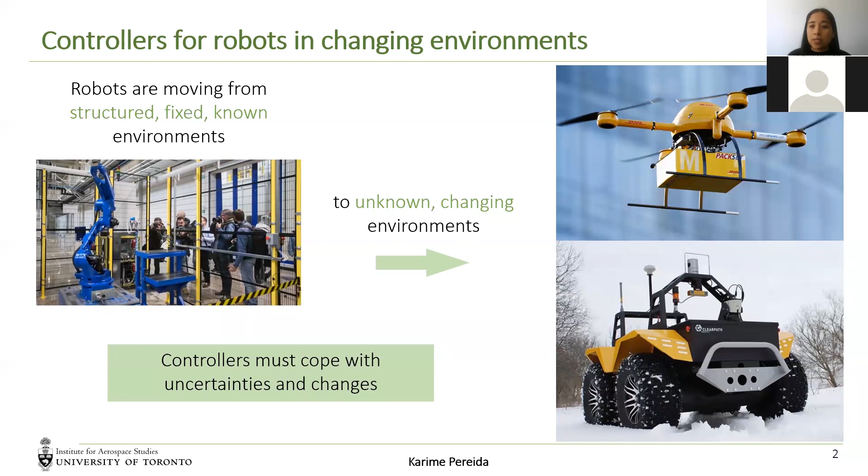In order to do this task successfully, robots need to have controllers that cope with uncertainties and changes. The goal for them is to follow a desired trajectory Y star accurately and reliably. What I mean by accurately is that they follow the trajectory very closely, and by reliably is that they follow the trajectory even if the conditions change or if the robot is changed.

Usually a controller looks in the following way. We have a system with an input and an output, and we usually have a feedback controller where we have some sensing or estimation of the output. We compare that to the desired trajectory and feed that into a controller. This controller has a model of the system, and if this model is very accurate, then the system is able to perform the trajectory.

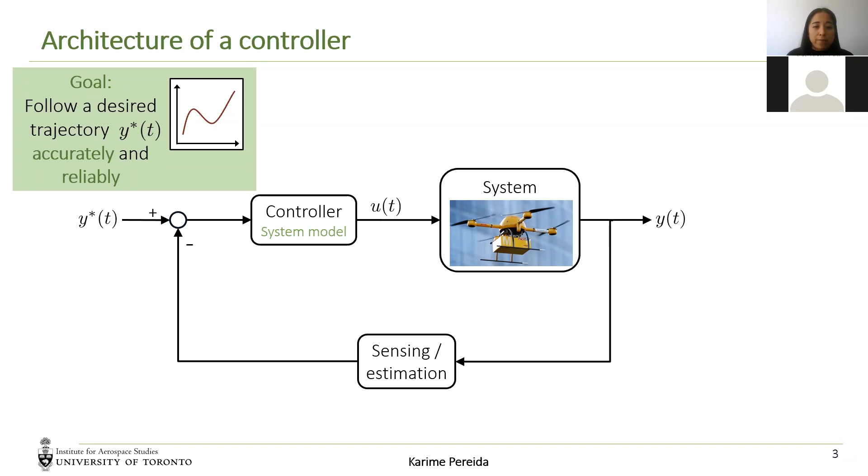However, in changing conditions, systems are subject to unknown disturbances. For example, these drones delivering packages are subject to different wind conditions when they fly, or they're subject to unmodeled dynamics. For example, they have different packages that they have to carry with different masses and centers of inertia. When the conditions change, the controllers may have lower performance or even instability.

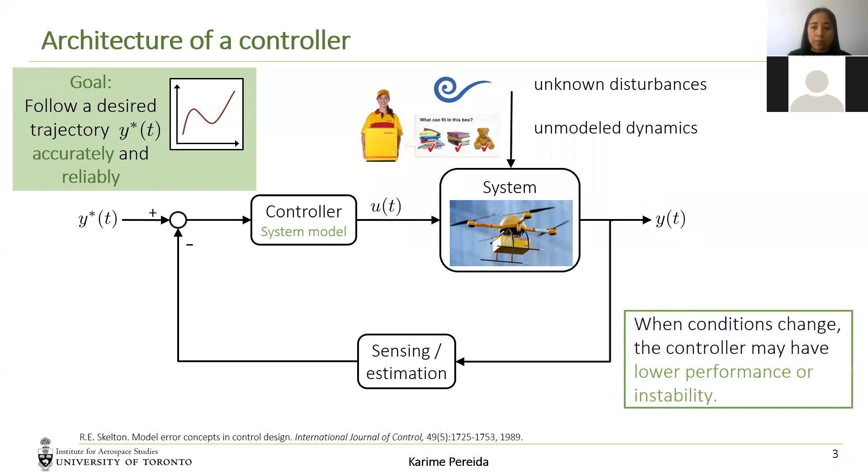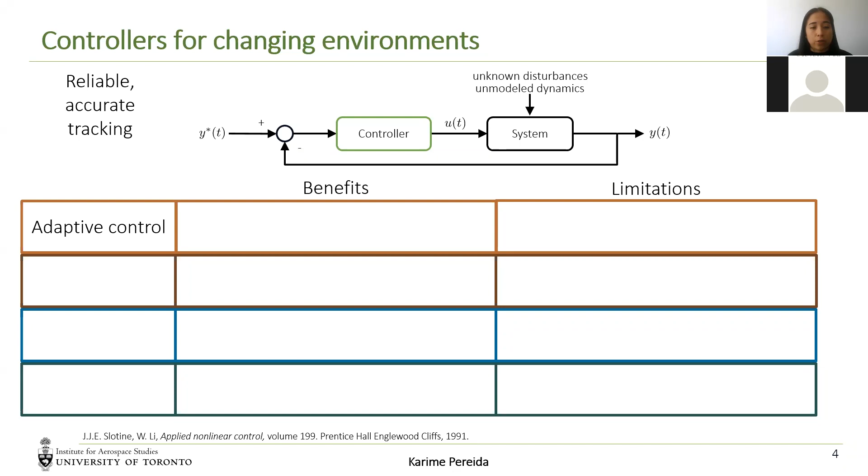In order to achieve reliable and accurate tracking, even if the system is subject to unknown disturbances and unmodeled dynamics, the literature has suggested different controllers. In particular, I'm going to tell you about adaptive and robust control first.

Adaptive control has fast adaptation to the current situation. However, it could have some residual tracking error. Robust control, on the other hand, has guaranteed stability and performance for all disturbances. However, it tends to be conservative.

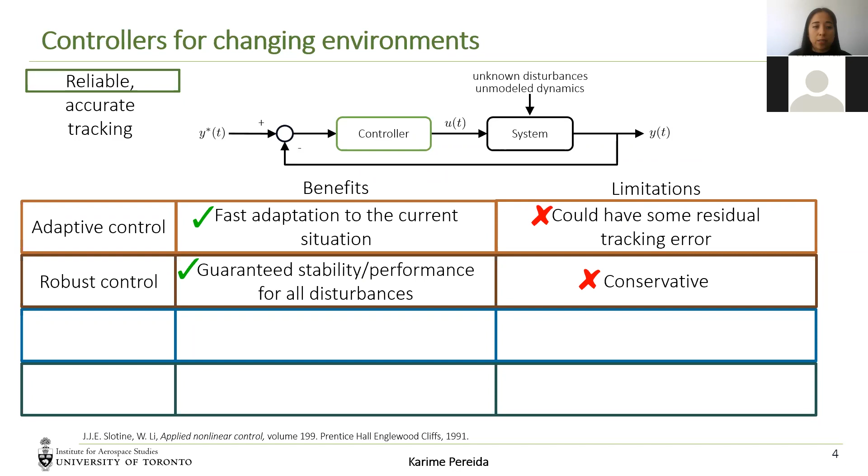So adaptive and robust control address the reliability objective. However, it doesn't address accuracy. In order to achieve accurate tracking, we have learning-based control, which improves performance with system data. However, it lacks stability guarantees. And we have optimization-based control, which calculates an optimal input, possibly online. However, it requires an accurate system model.

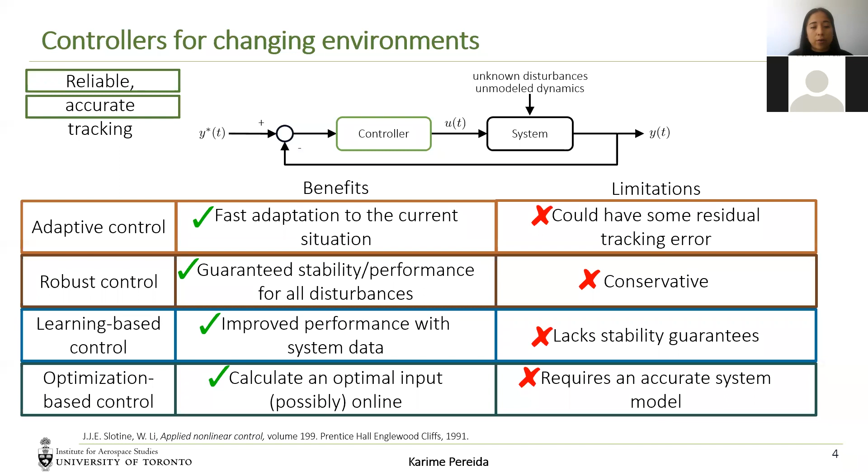Therefore, these two controllers tackle the accuracy of the task. However, they don't guarantee reliability. In my doctoral work, I try to develop controllers to achieve high accuracy trajectory tracking in changing environments, show stability, and provide performance guarantees. And I wanted to validate these controllers through extensive experiments on real drones.

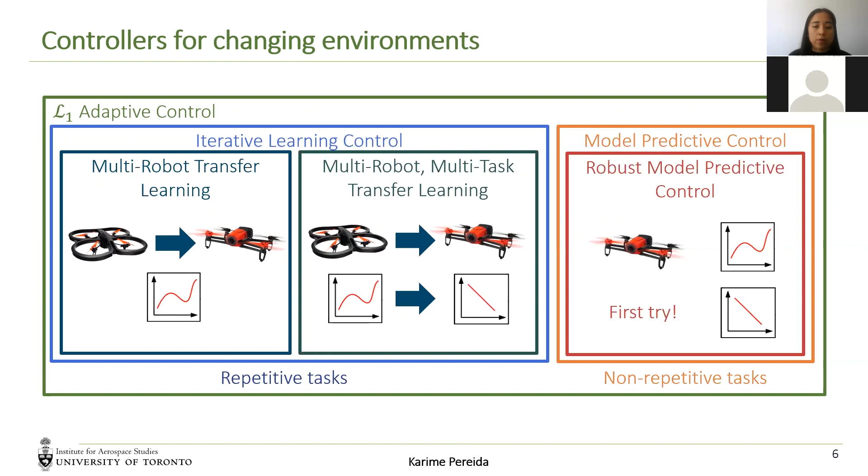The controllers that I propose in my thesis are centered around the L1 adaptive control in order to handle disturbances. And if the drones have to perform repetitive tasks, I exploit this with an iterative learning control in order to improve tracking over iterations. In this vein, I also proposed a multi-robot transfer learning framework and a multi-robot multitask transfer learning framework. If the robots don't have to perform the same task, for example non-repetitive tasks, I proposed a model predictive control in order to improve tracking online, and a robust model predictive controller in order to account for the remaining uncertainties despite the presence of the L1 adaptive controller.

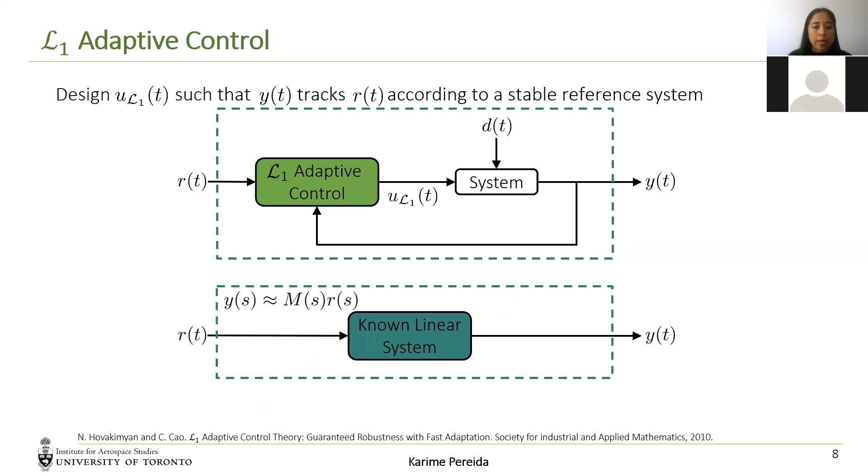Using the three main components of the L1 adaptive control—the adaptation law, the control law, and the state estimator—the L1 adaptive control is able to make systems behave close to a known linear model described by the transfer function M of S, despite the presence of disturbances.

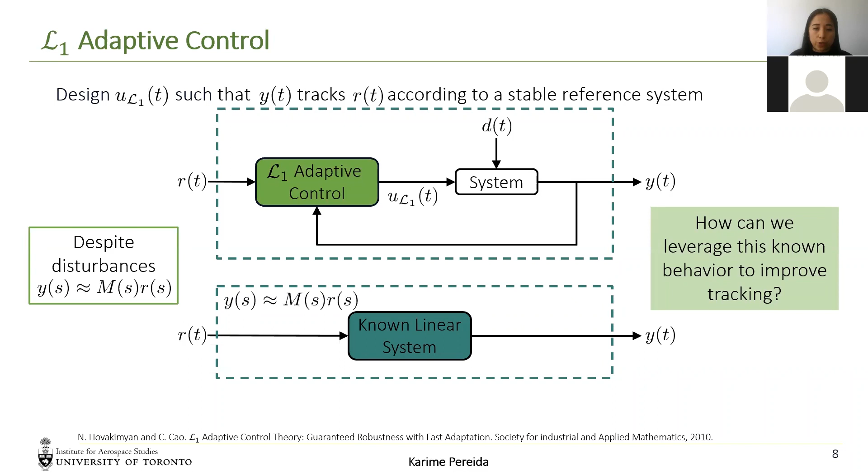So the question in my thesis was, how can we leverage this known behavior in order to improve tracking? In order to do this, I propose the following architecture.

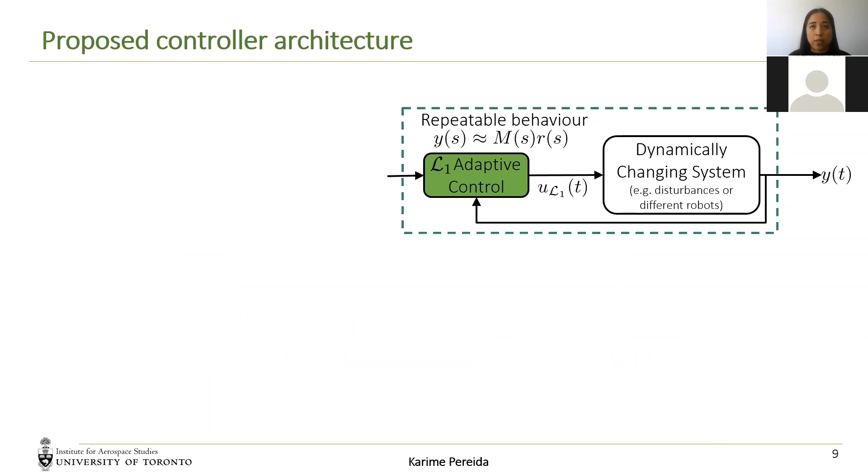We have a dynamically changing system, which can be subject to disturbances or changing dynamics, or even be different robots. And I propose to have an L1 adaptive controller in order to achieve repeatable behavior described by M. In this way, I'm able to handle disturbances.

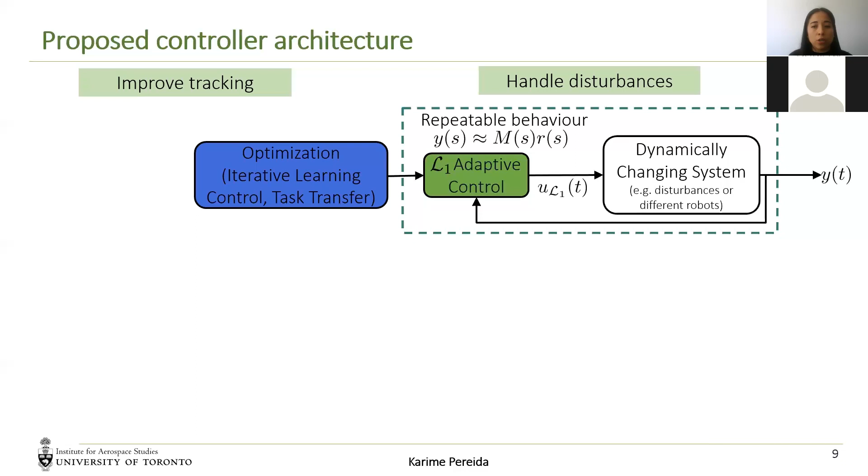In order to improve tracking, if the system is doing repetitive tasks, I propose an optimization block, which can be an iterative learning controller or a task transfer learning framework, in order to modify the reference offline such that the system accurately tracks the desired trajectories.

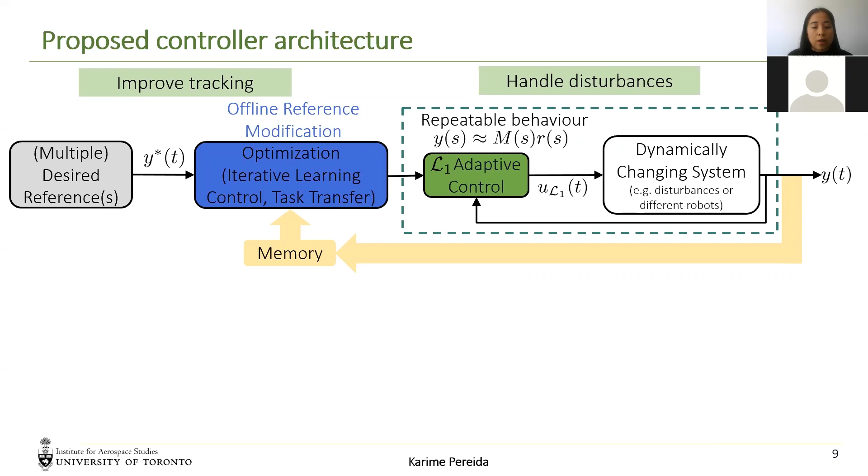If the system is performing non-repetitive tasks, I again propose an L1 adaptive controller in order to achieve repeatable behavior, and a robust model predictive controller in order to modify the reference online such that the system accurately tracks these trajectories.

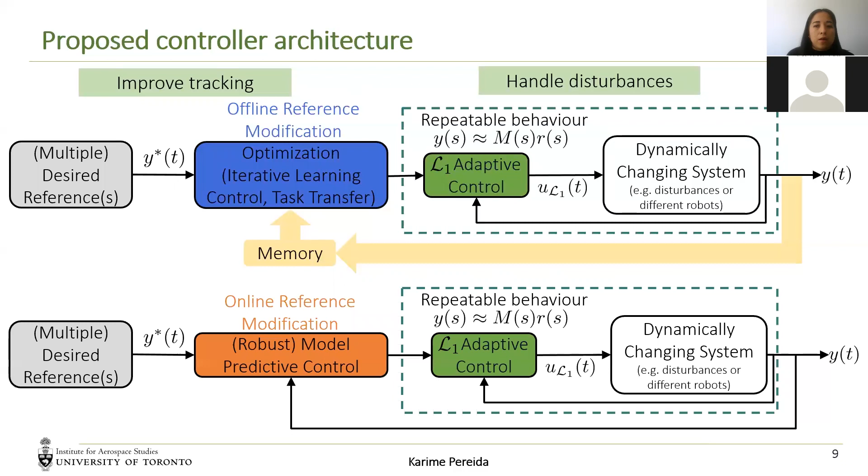So first, I'm going to tell you about the iterative learning control and L1 adaptive control framework, and these results were presented at ICRA in 2017.

Iterative learning control, or ILC, improves the tracking over iterations by learning systematic disturbances. So the controller I propose is the following.

If this assumption is not satisfied, that is, if the disturbances affecting the system are not repetitive, the performance of the ILC decreases. So in the proposed controller, we use an L1 adaptive controller in order to achieve repeatable behavior despite the presence of disturbances.

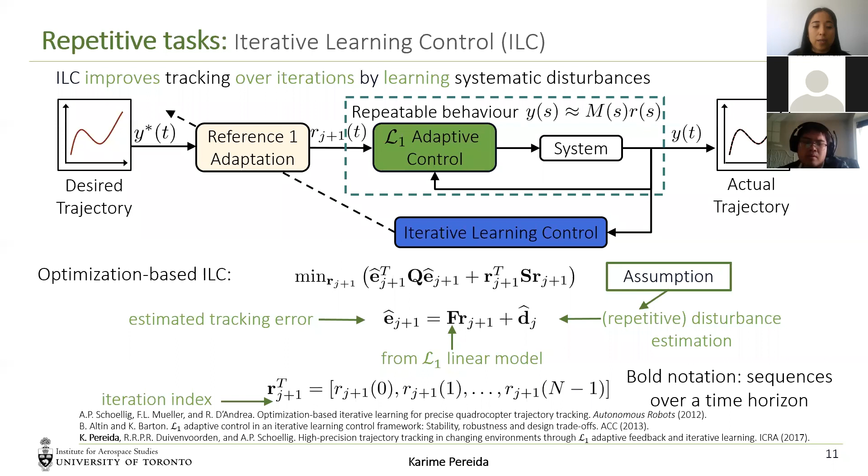And so the ILC just modifies the reference such that the system accurately tracks the desired trajectory. In experiments, I compare this L1 with ILC framework with an ILC with underlying PD and PID controllers.

Now, the error that I'm going to be telling you about is the average position error, which is the difference, an average error of the X, Y, and Z axis over the whole trajectory.

In experiments, I started learning with an AR drone, and I compare the PD, PID, and L1 ILC frameworks. And as you can see, over a 10 iteration learning process, all three frameworks are able to decrease the tracking error of the system.

After this learning process, I introduce a fan disturbance somewhere along the trajectory. As you can see, the L1 adaptive controller is able to handle these disturbances. Therefore, the drone is able to keep a low tracking error.

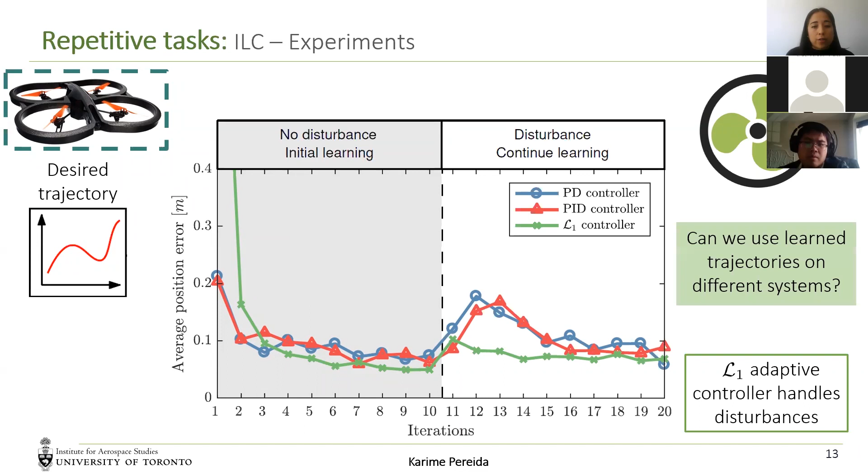However, the PD and PID controllers are not able to do so, and the error increases. So I thought, can we use learned trajectories on different systems?

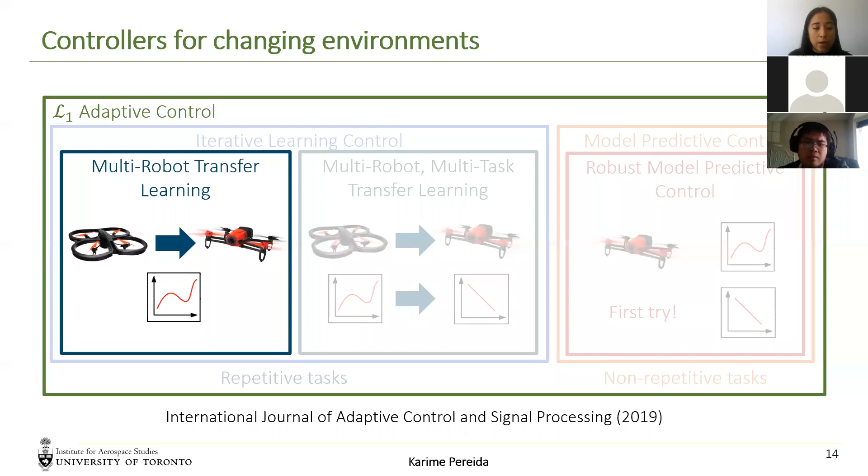To do this, I proposed a multi-robot transfer learning framework, and the results of this were presented at the International Journal of Adaptive Control and Signal Processing in 2019.

The key idea behind the multi-robot transfer learning framework is that learned trajectories can be transferred among systems with an L1 adaptive control. This works in the following way.

We have a system 1 with an L1 adaptive control, and a system 2, again with an L1 adaptive control, that is able to make both systems behave like the same linear model.

Therefore, once system 1 learns to follow the desired trajectory, we can transfer this knowledge to the second system such that it follows this desired trajectory accurately.

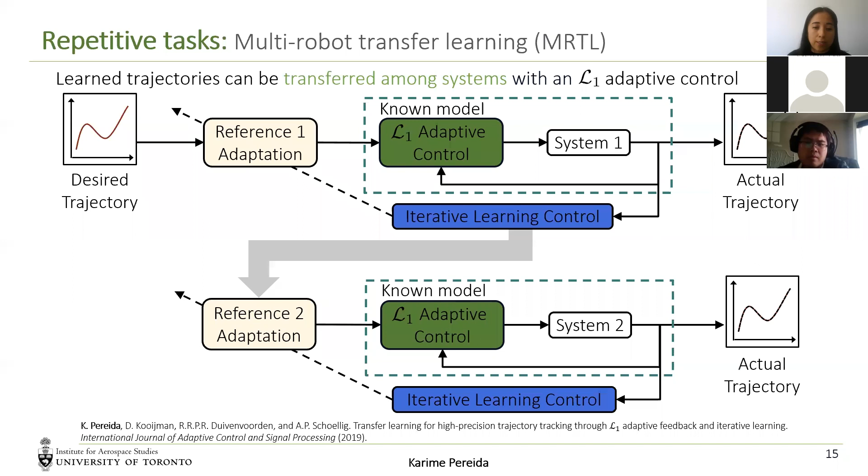In experiments, I started learning again with an AR drone, and I compared the three frameworks, PD, PID, and L1 with an iterative learning controller. After this 10 iteration learning process, I transferred this knowledge to a Bebop drone.

As you can see, since the L1 adaptive controller is able to make the two systems behave like the same model, the Bebop drone achieves a very low tracking error on the first iteration after transfer. However, the PD and PID controllers are unable to do so, and in fact significantly increase their tracking error.

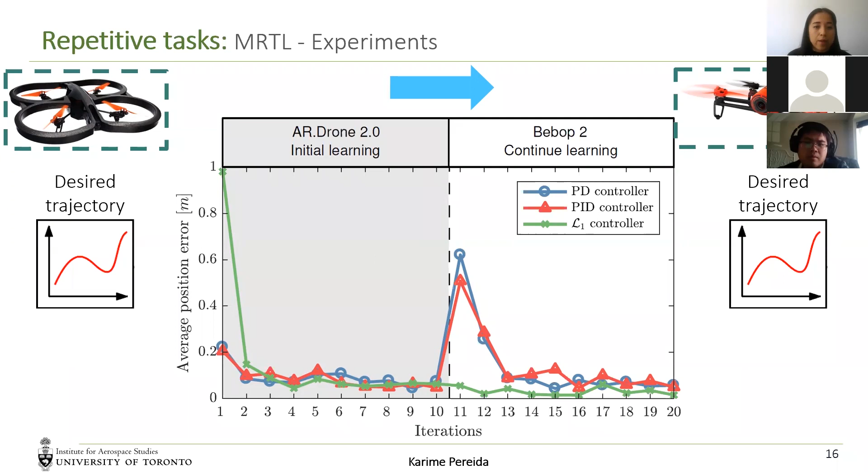In the following video, I'm going to show you a comparison between the L1 and PID controllers with ILC. As you can see, in the first iteration, both controllers are not that good at tracking the desired trajectory.

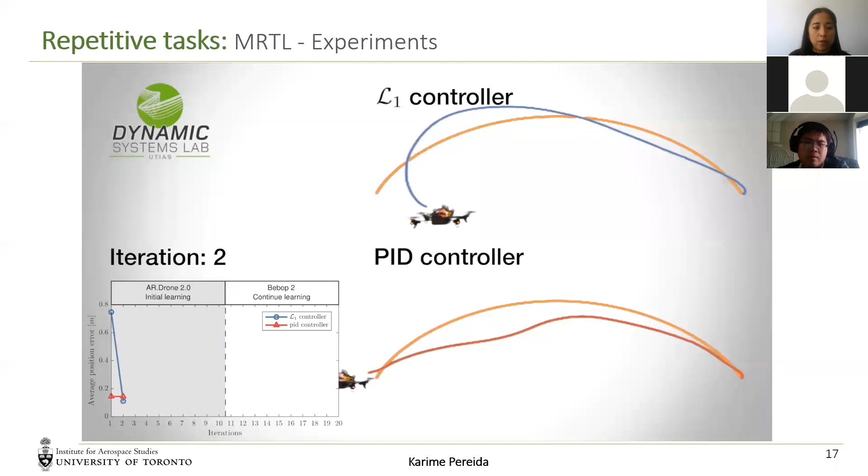However, with more iterations, they improve their tracking performance. I'm not going to show you all 10 iterations, just the last one in this video. As you can see, both systems improve their tracking performance.

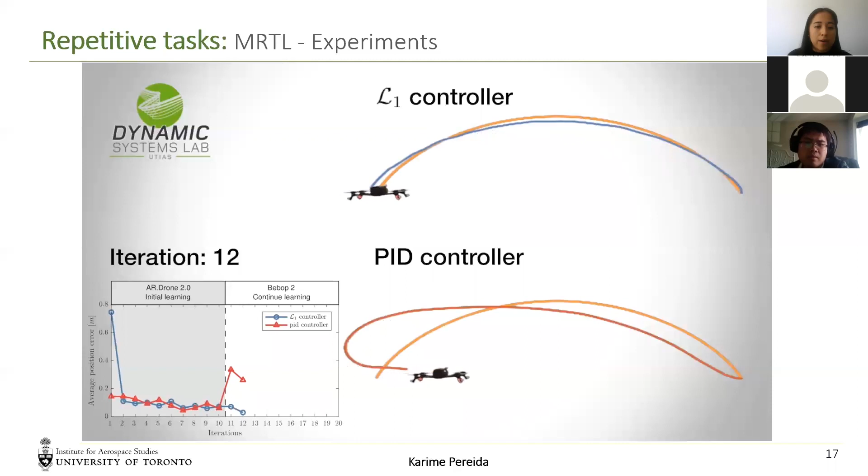After 10 iterations, I land with the AR drone and take off with a Bebop drone. As you can see, the L1 adaptive control is able to make the system have a very low tracking error even after transfer. Both drones continue learning, and the results of the 10-iteration learning process are shown in the following plot. The L1 adaptive controller is able to maintain very low tracking error even after transferring.

This is good. However, every single time we want to track a new trajectory, we need to start a new learning process. So we thought, can we generalize learned trajectories to new, unseen trajectories?

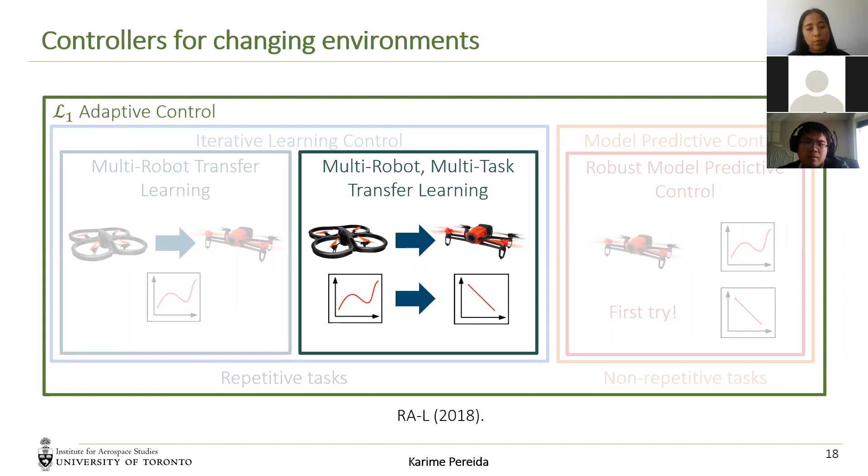In order to do this, I proposed a multi-robot, multi-task transfer learning framework, and the results were published in RAL in 2018. First, I'm going to tell you about the multi-task transfer learning framework.

This multi-task transfer learning framework is efficient, as only a single 6-second trajectory is necessary to learn the map. The way we formulate this framework enables us to use it with a multi-robot framework, in order to achieve a multi-robot multi-task transfer learning framework.

The way it works is as follows: we have our usual multi-robot transfer learning framework, but now after system 1 learns to track the source trajectory, we use our multi-task transfer learning framework in order to generalize this learned trajectory, such that system 2 can accurately follow this target trajectory.

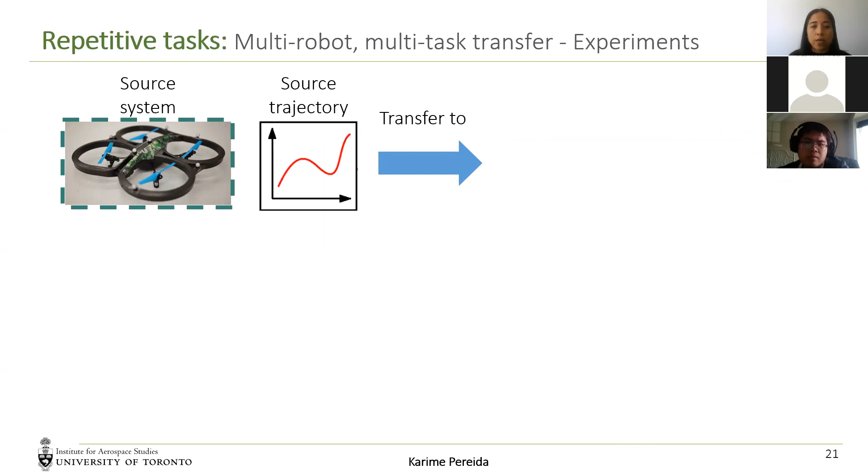In experiments, we use an AR drone as a source system following a source trajectory, and we want to transfer to a target system, in this case the Bebop drone, following a target trajectory. We use the following 6 trajectories to test our approach.

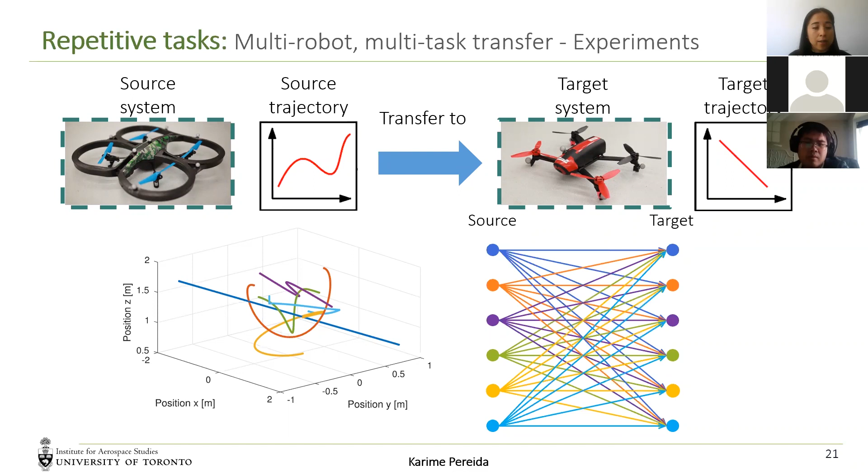The way we do this is that we use each of the trajectories as a source to learn the map, and transfer it to each of the 6 target trajectories. Doing so with each of the trajectories leads us to 36 experiments.

These results are very impressive, considering that we use only a 6-second trajectory in order to learn the maps to achieve the transfer. This is good, however, every single time that we want to...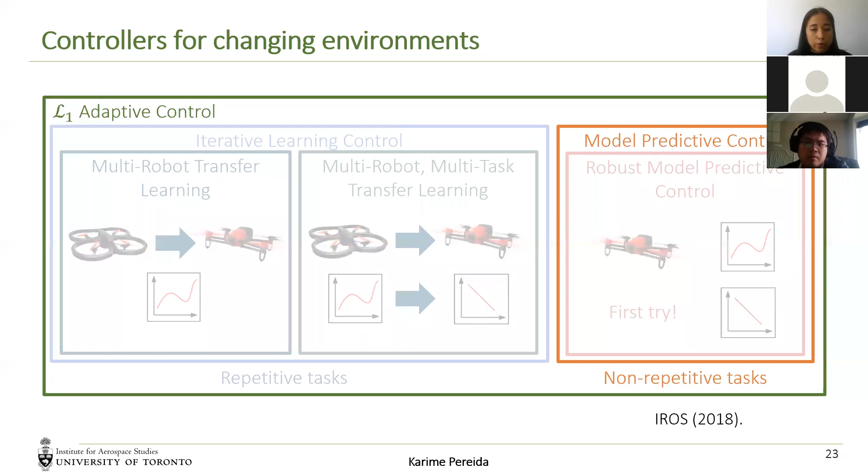Track a trajectory, we need to use a learning process. So we thought, can we improve the tracking of non-repetitive tasks? In order to do so, we proposed a model predictive controller, and these results were published in IROS in 2018.

Model predictive control, or MPC, calculates input sequences that are optimal with respect to a cost function, subject to state and input constraints. The architecture that I proposed is as follows: we have an underlying L1 adaptive controller and a higher level model predictive control. Notice here that the adaptation is distinct from the optimization.

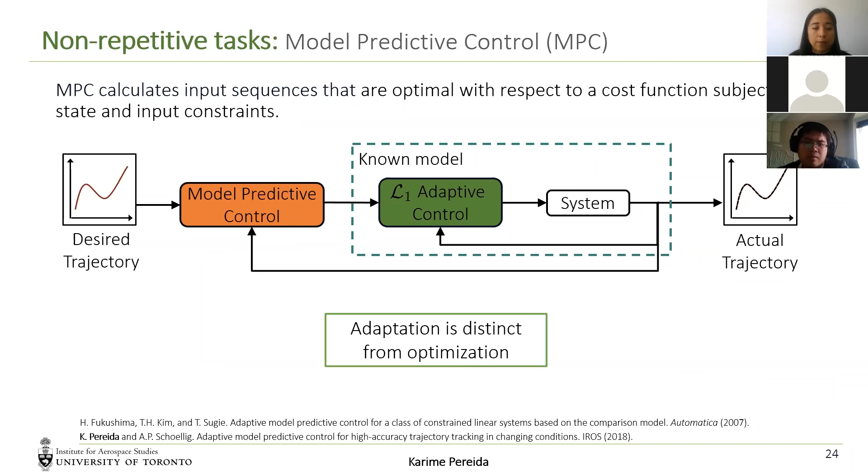I tested the proposed framework under wind disturbances with the following 5 trajectories, and I compared it with an MPC using an underlying PID controller. The results are shown in the following plot, where I show the error of the 5 trajectories for the MPC-PID and MPC-L1 frameworks. As you can see, the proposed MPC-L1 is able to achieve a lower tracking error.

After this, I introduced a wind disturbance with a fan, and as you can see, the MPC with L1 is able to achieve very similar performance. That is, it keeps a very low tracking error despite the presence of the disturbance, while the MPC-PID increases the error in 4 out of 5 trajectories.

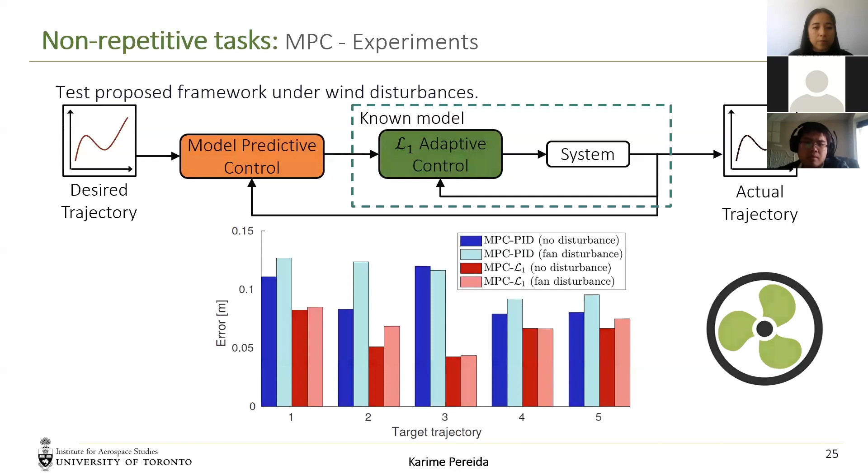Now in experiments, I'm going to show you a quick video where on the top you will see the proposed MPC with the L1 framework, and on the bottom the MPC PID. On the right, you will see the trajectories in the X, Y, and Z axis, and the trajectory that the drone is trying to follow.

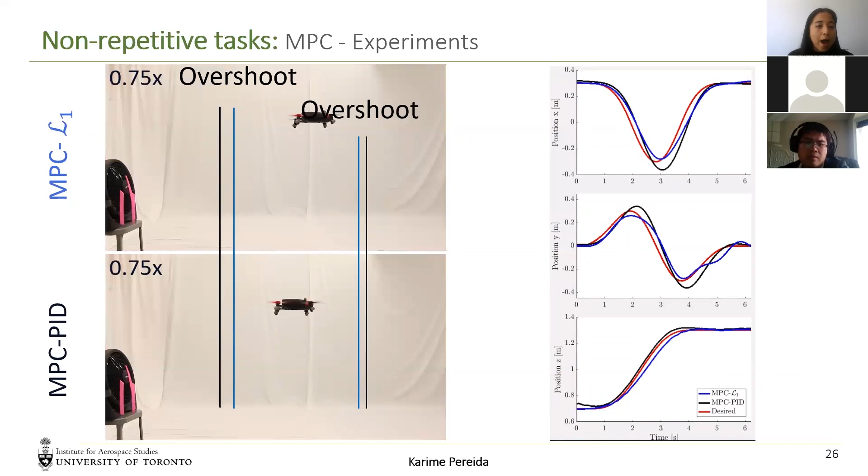Imagine that it's trying to go around a cylinder. As you can see, with the MPC PID framework, the drone overshoots, therefore it has a higher tracking error than with the MPC controller. After this, we turn the fan on in order to disturb the drone, and you can see that the MPC PID has a larger overshoot. We also compare this overshoot with the previous overshoot that it had, so that with the wind disturbance, it increases, therefore it has an even higher tracking error.

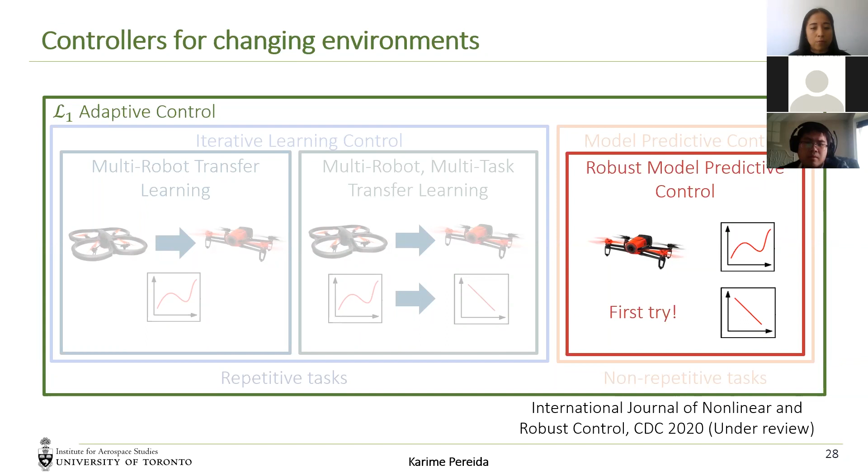Finally, I proposed a robust model predictive control, since the L1 adaptive control is not perfect, and there are still residual errors that have to be compensated for. The results of this are on review at the International Journal of Nonlinear and Robust Control and CDC 2020.

So far, we have assumed that the state of the system with the L1 adaptive control, X, is the same as the state of this idealized system, which is the linear system X-ID. However, this is not true, and the state of the system with the L1 adaptive controller differs from the state of the idealized system. But we can calculate theoretically a bound between the state of the idealized system and the state of the actual system.

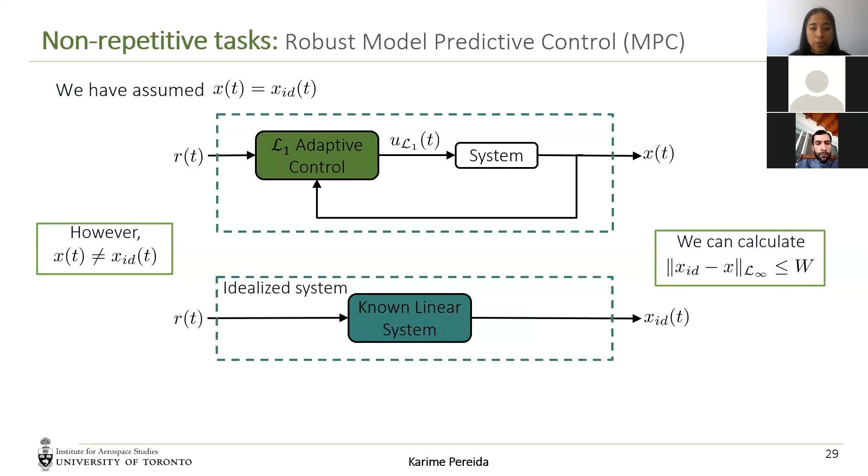So we thought, can we use this bound in a robust controller? I proposed to use a robust model predictive controller, which calculates input sequences that are optimal with respect to a cost function subject to state and input constraints. In this case, we are able to include modeling errors.

The way this works is that we have a cost function that penalizes error and control effort, where the error is defined as the difference between the desired state and the actual state. This cost function is subject to input and state constraints, and is also subject to a dynamic model constraint, where the dynamic model in this case comes from the idealized system of the L1 adaptive controller.

The idea behind this robust model predictive control framework is that there exists an ancillary controller which keeps the system state with a modeling error in the vicinity of a nominal state with no modeling error. Therefore, if we modify our control law in order to include this ancillary controller and reduce the space of our input and state, we can guarantee that our actual system with modeling error stays in the vicinity of a nominal system with no modeling error.

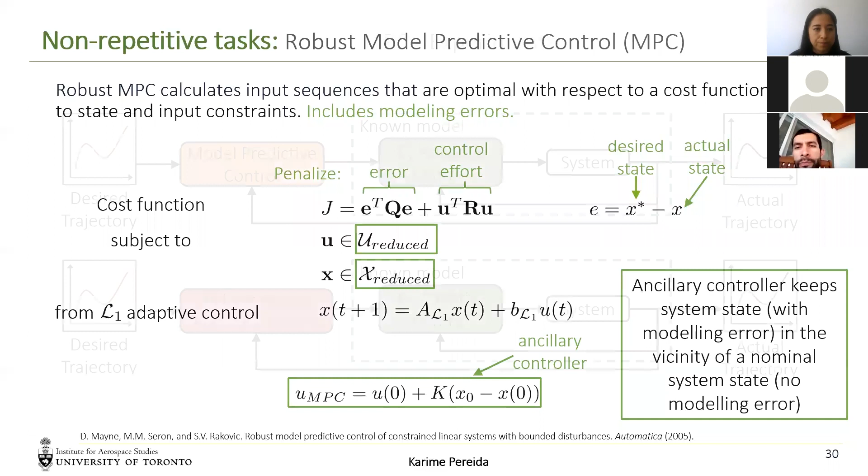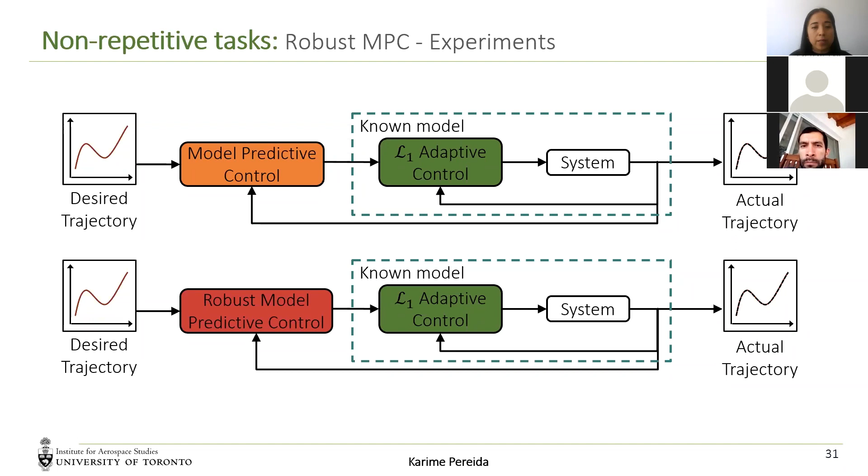In experiments, we compare the nominal model predictive control with underlying L1 adaptive controller with our proposed robust model predictive control with underlying L1 adaptive control. In this case, the goal is to follow a straight line as close as possible, even if we introduce an obstacle in the system.

However, because the nominal MPC does not account for the modeling errors, after some time it ends up colliding with the obstacle. However, our proposed robust model predictive controller includes the modeling errors and is able to complete this task successfully.

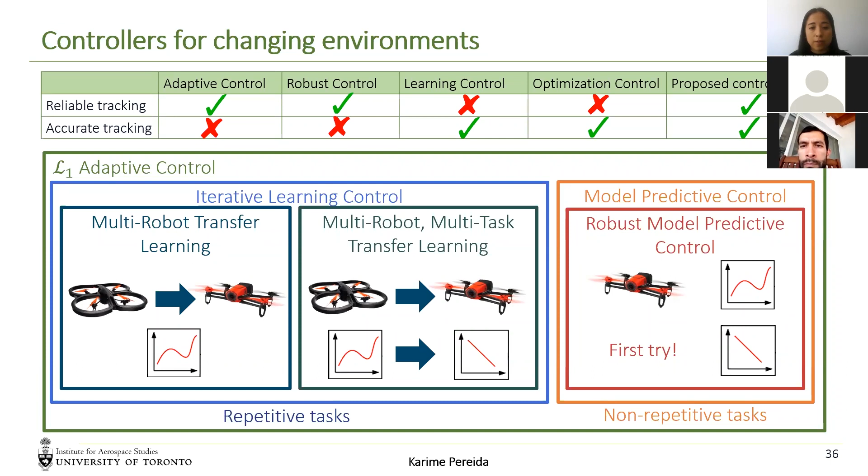In summary, in my thesis, I wanted to achieve reliable and accurate tracking, and I did so by using adaptive and robust control in order to tick the reliability checkbox, and I use learning-based and optimization-based controllers in order to achieve accurate tracking. Therefore, I'm able to achieve reliable and accurate tracking.